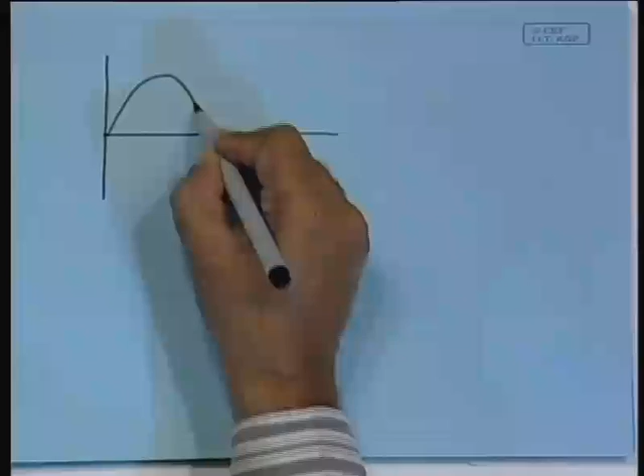By the way, which part is the high tide and which part is the low tide in this sinusoidal waveform? Is it this part and this part? Wrong. From here to here it is the low tide, and from here to here it is the high tide. Remember the timing: this part is when the water is going out, and this is when the water is going in. So this part is called the high tide and this part the low tide, not simply the positive and negative parts of the waveform.

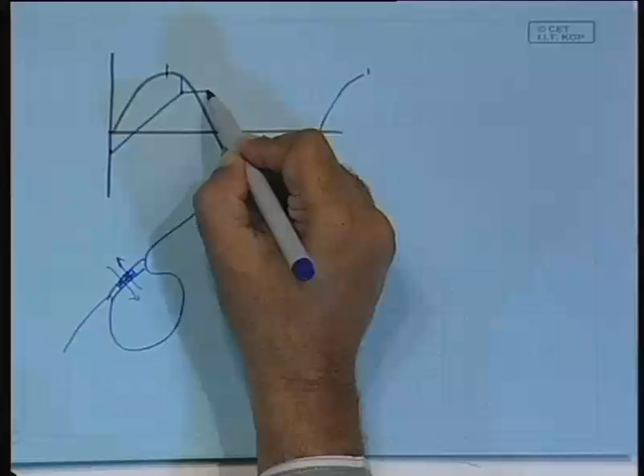Now it was intermittent because if you have a scheme like this, with the turbine here, suppose it is a two-way turbine, during the high tide period it will go up until a certain time when the head is no longer sufficient, and then it is closed. So these are the periods when it will not be generating any power.

And these no-generation periods will come how many times per day? This is one cycle which occurs approximately in 12 hours, so 4 times per day such periods will come when there will be no power generation.

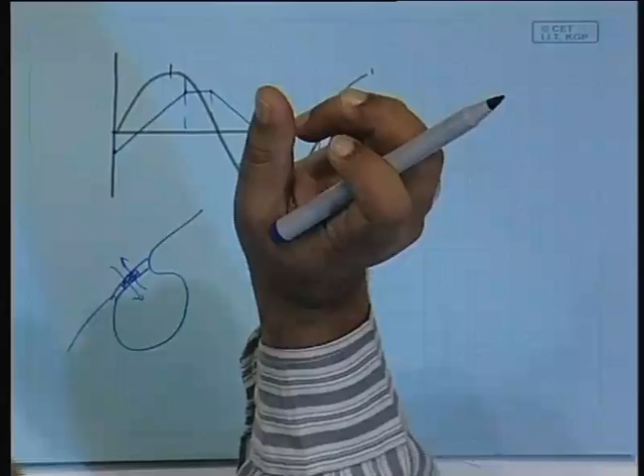So if there is sufficient amount of hydroelectric power capacity in the power system... please, no, you are too late. Okay, come in. I do not understand this, and things are getting recorded.

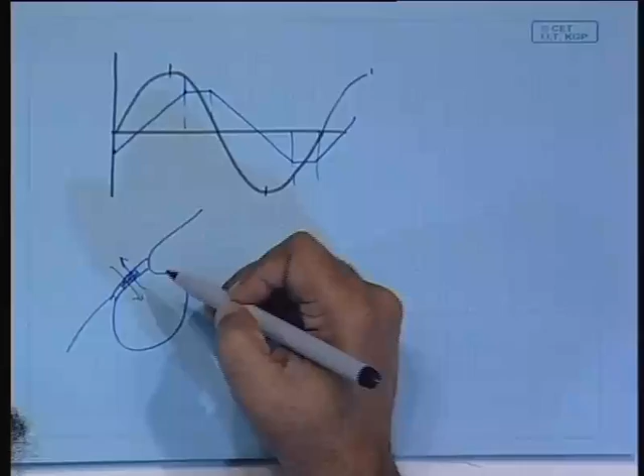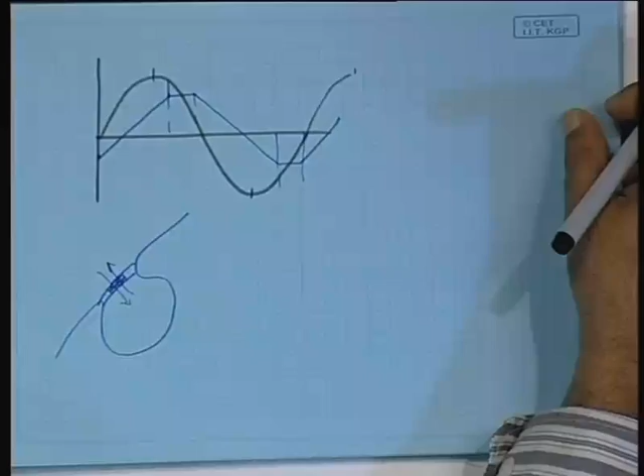So there has to be some other means to produce continuous power, and indeed there have been such proposals and installations where continuous power production is possible. One idea out of many that are available, I will illustrate here.

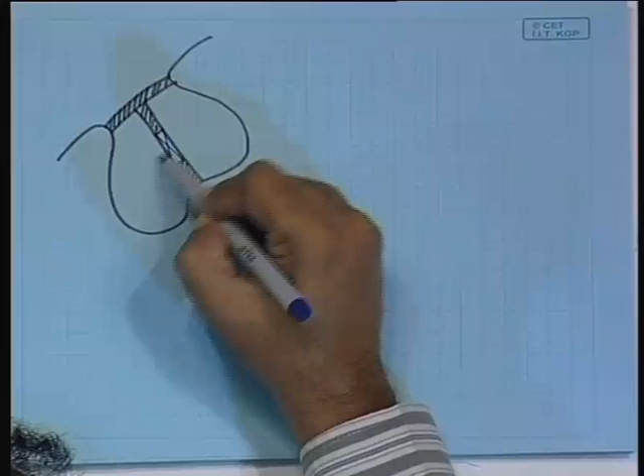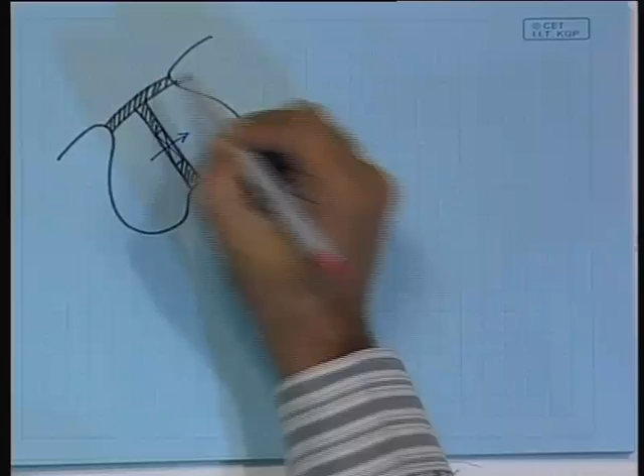Suppose you have some kind of topography like this, so that you construct a dam here, and suppose you construct another dam here, so that the actual basin is divided into two basins. This is one dam and this is another dam. And the turbine is installed not there, but here - a one-way turbine, which is relatively less expensive, meaning it either goes this way or that way. Suppose it goes this way, and in these two parts of the dam there are two sluice gates like this.

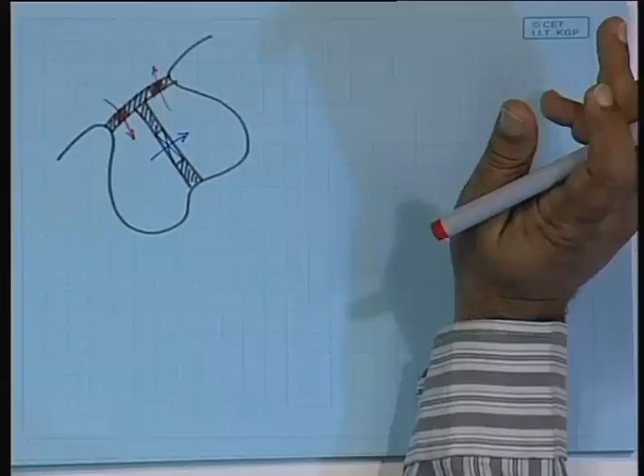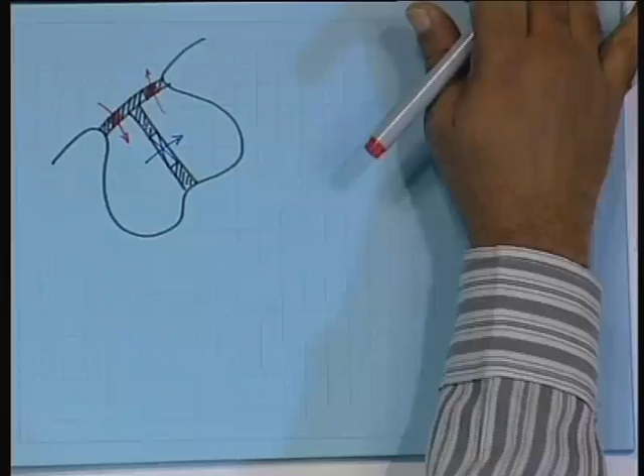In that case, this basin will be maintaining a relatively high water level, and this basin will be maintaining a relatively low water level, because during the high tide you are allowing water to come in, and during the low tide you are allowing water to go out from here. So perpetually there will be a pressure head difference between these two, and this turbine works utilizing that head difference.

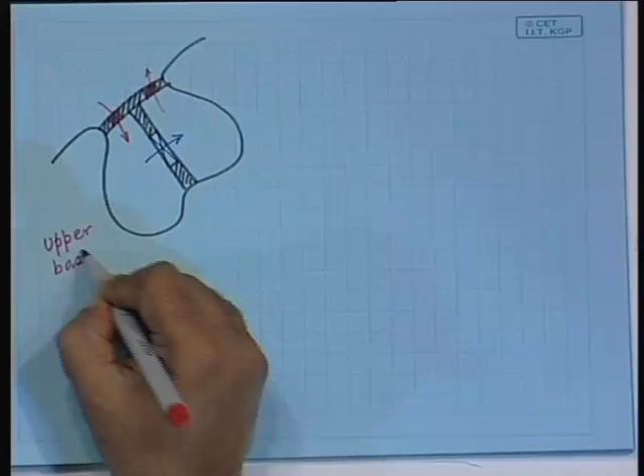So the turbine does not work utilizing the head difference between the sea and the basin, but rather the upper basin and the lower basin. So this is the upper basin, and this is the lower basin. Is the concept clear?

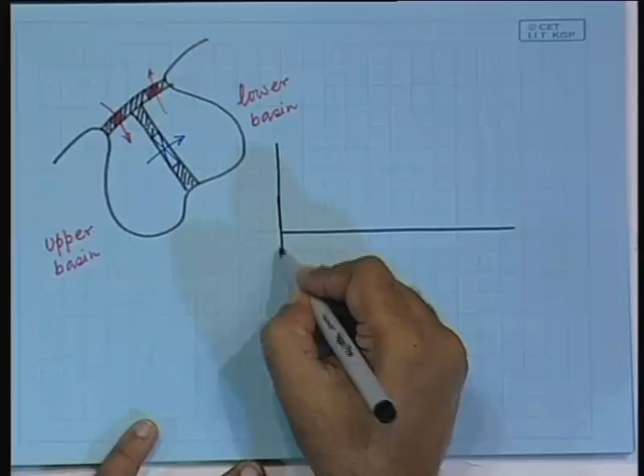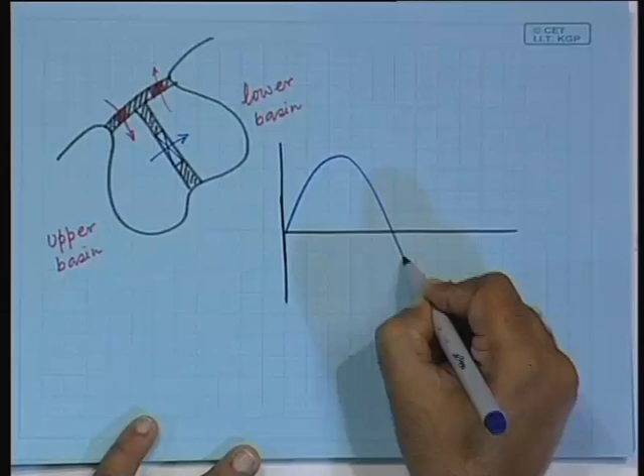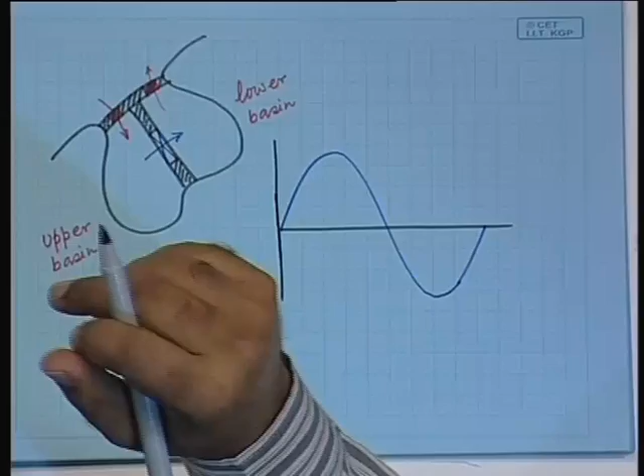Now, in that case, what would be the waveforms like? The sea water level, let it vary like this. Now, the basin water level, there will be two basins, and I will have to draw with different colors. So what I will do is I will draw one with black, another with red. Say I am talking about the upper basin.

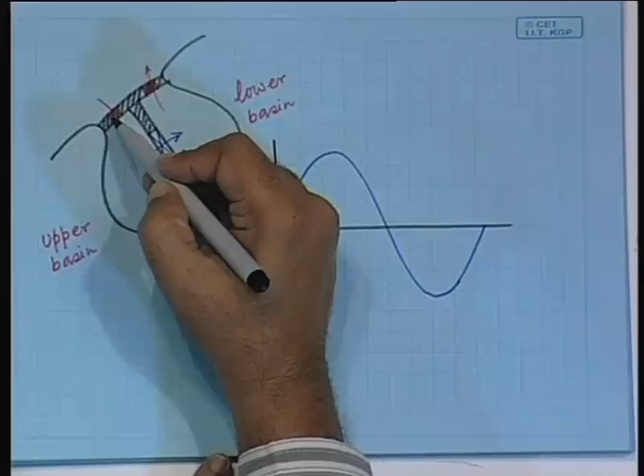So, during the high tide period, the upper basin is open to the sea, right, and therefore it should be filled up, and the difference between the sea level and the upper basin level will be very small. So we can assume it to go up like this.

Now, when it is filled up, when this level is reached, very close to this level is reached, then obviously the gate is closed and therefore it will fall. Right? Why does it fall? Because the water is going from this basin to that basin and therefore the water level falls.

Okay, now let us see what happens to the lower basin. The lower basin, this gate was actually closed during the high tide period up to this point. So it was only rising. Why rising? Because water was coming in from this basin. So even though this gate is closed, it was rising slowly like so.

Say it comes to this point, and at this point what will you do? You will open the sluice gate, right. If the sluice gate is opened, then the water level falls. It will be slightly greater than the water level in the sea, but nevertheless it falls like this.

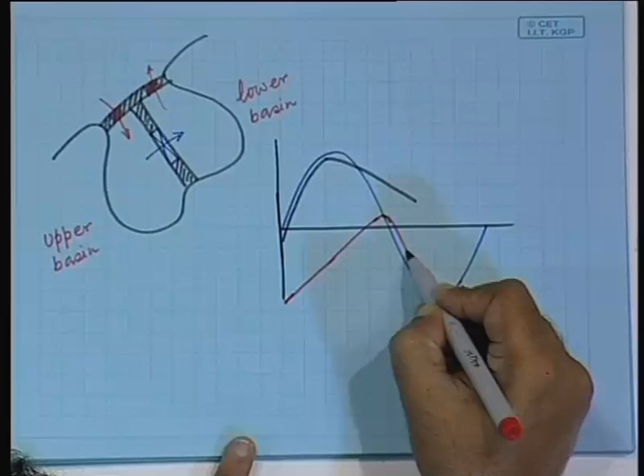And this fellow continues till what time? Till this time. At this time, it again becomes equal to the sea level, and then the sea level would be increasing. So this sea level is increasing, it goes like this, and it comes here. So if I continue to draw, it will be like this, the way it was rising here.

What happens to the lower basin at this point? It is again closed, and then the lower basin's sluice gate is closed. So it again keeps on rising like this.

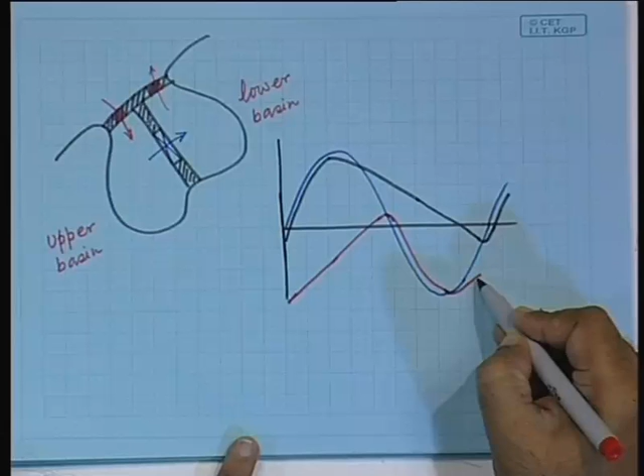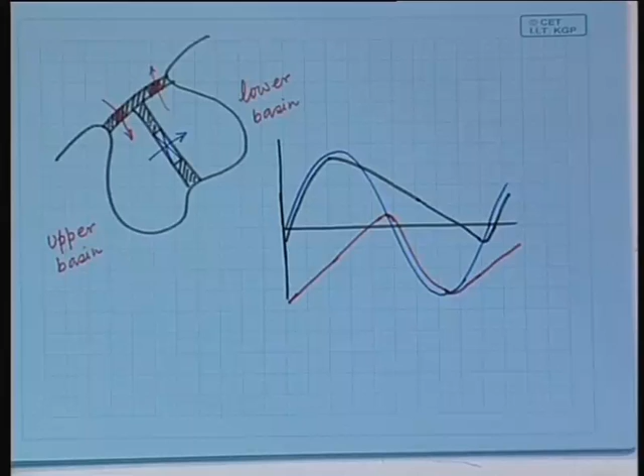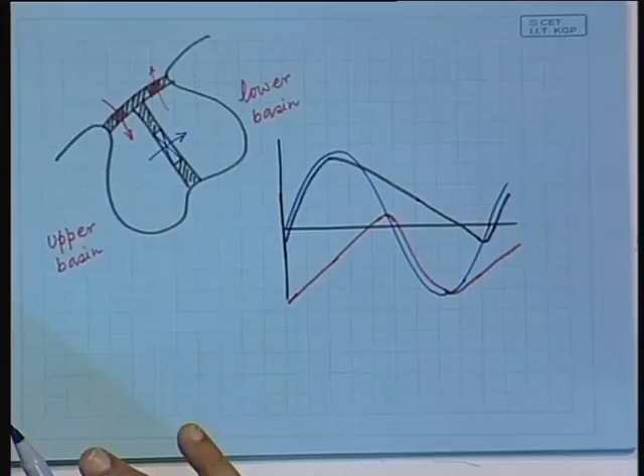So at any time lower basin, upper basin, will the level of lower basin and upper basin match? Same level? No, because all the time there is a level difference maintained between the black one, which is the upper basin level, and the red one, which is the lower basin level. You can always see there is always a head difference between the two that is maintained.

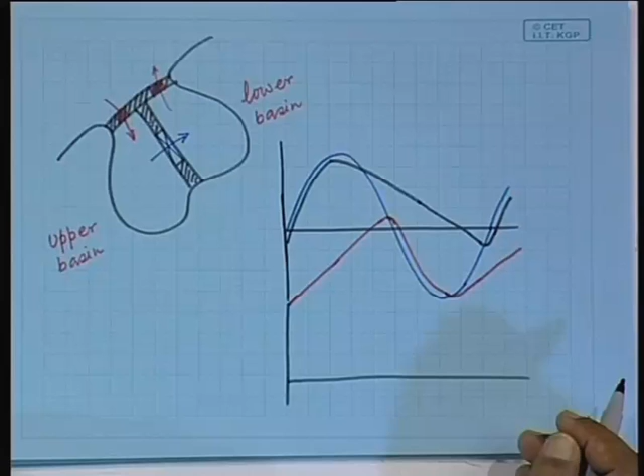So if you draw the curve for the power generation. Sir, yes, so when the water in the upper basin is being filled up in the first half, won't there be a water leakage into this lower basin because you have a turbine? Yes, all the time water is going into that, but I am assuming that more water is coming in through the sluice gate, because the sluice gate does not offer much resistance. So we can logically assume that it would be more or less closely following the seawater level.

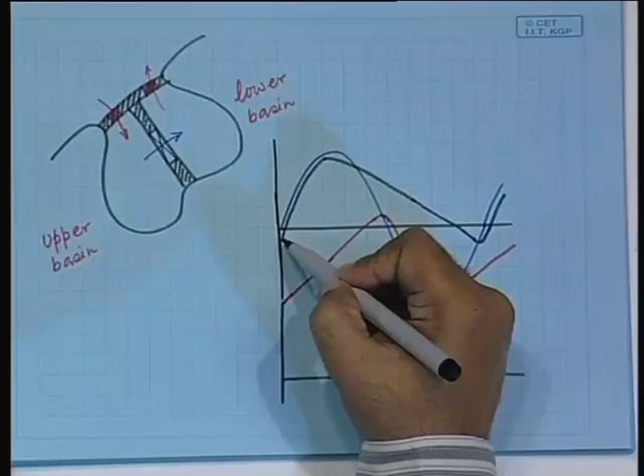Yes, all the time water is going, not leaking in, it is going from this side to that side. By design it will go, but nevertheless more water is coming in from the sea side. So we can logically assume, though it may not be as closely following as I have drawn, it is just in order to illustrate, it may be slightly less.

So what will be the waveform for the power generation like? Notice that even though all the time there is a head maintained, the power generation is definitely not constant, because the head is not constant all the time. The head is large during this period, small during this period, again large during this period.

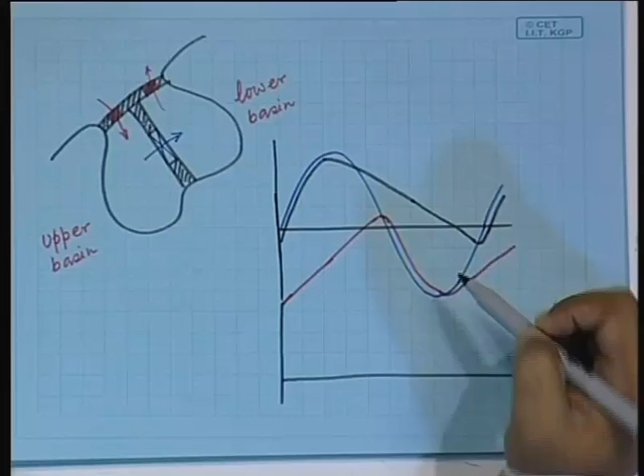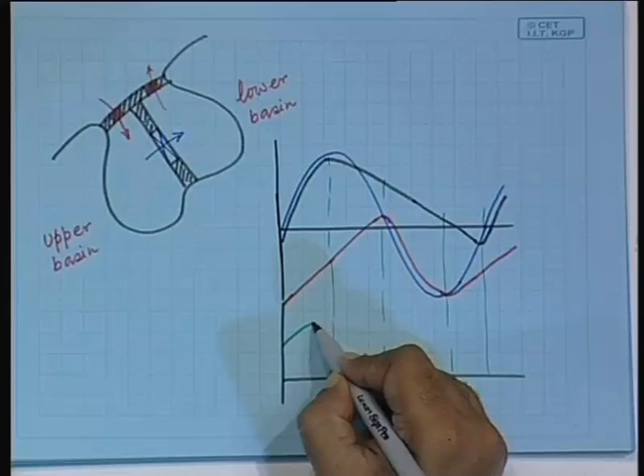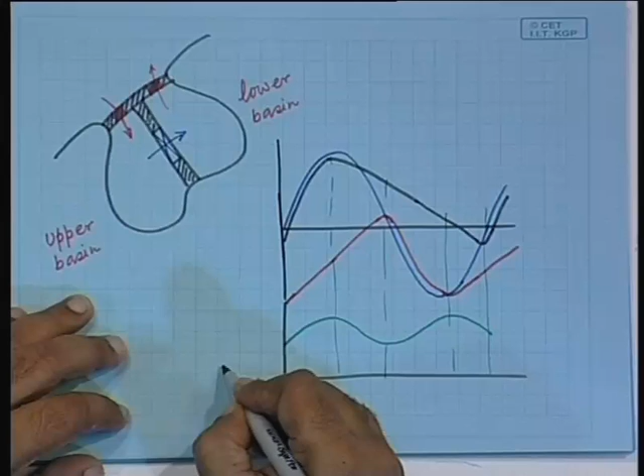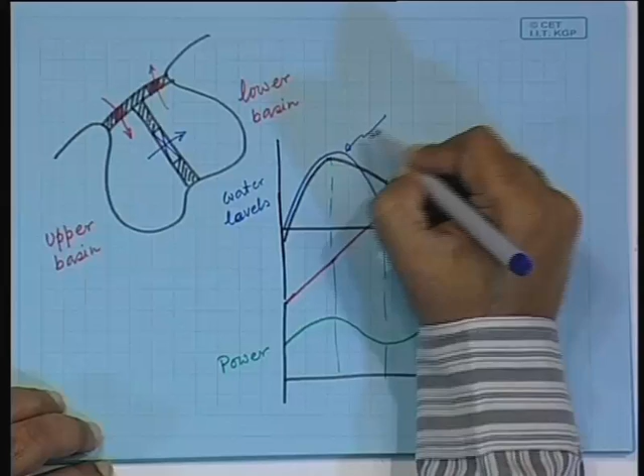So you will see that during this period I expect it to be large, and then it will fall, then it will be large, then it will fall, but nevertheless all the time you have power generation. So the power curve is this, the water levels here. So this is the sea, this is the upper basin, and this is the lower basin.

So when does this sluice gate open and close? I am coming to that. This is the curve of the power generation.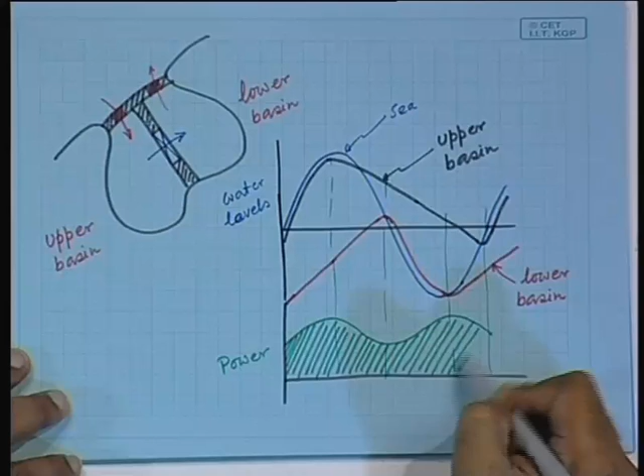So his question is when do the two sluice gates open and close? Can we specify those periods? Let us see. This is sluice gate 1 and this is sluice gate 2, say.

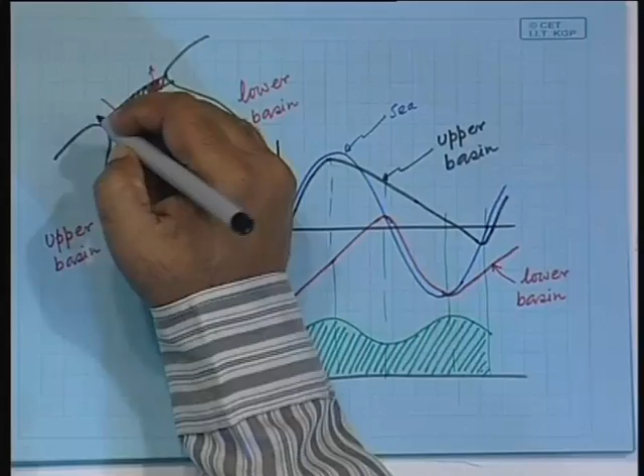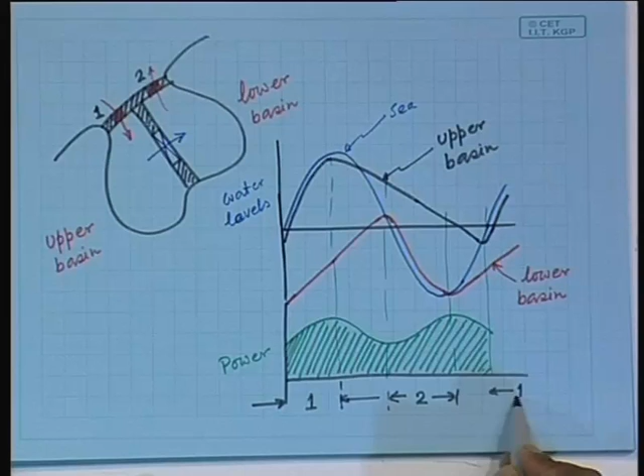Is it visible this side? Yes, it is visible. So 1 is open during this period till this point. Then at this period both are closed. The sluice gate 2 opens from this period to this period. So 2 is from... again both are closed, again at this time 1 opens, right.

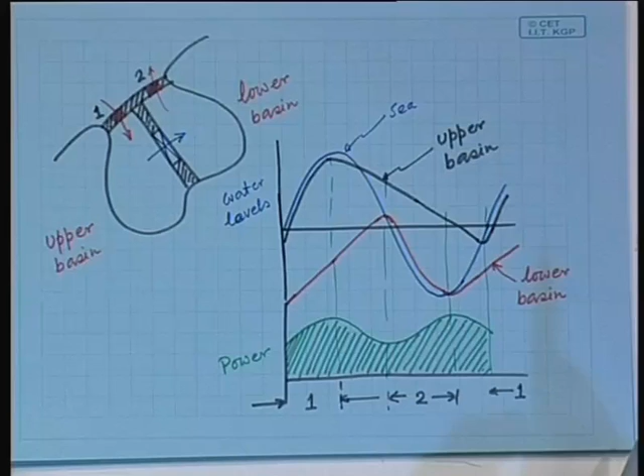So this is called the double basin. That is why I had earlier mentioned single basin, because there are also double basin schemes. It goes by the name of the engineer who designed it. Now this is for example in use in La Rance in France.

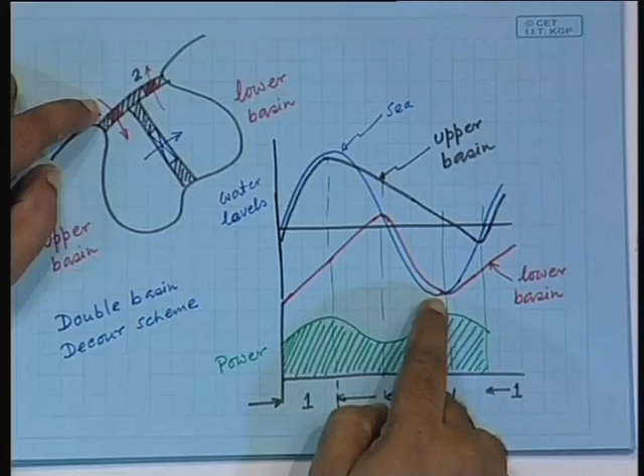Clear. Now similarly, we can easily imagine that there can be more. You might possibly argue why not install turbines here also. There can be those possibilities, turbines installed in those places, yes. You might argue why not use pumps in those places to increase the water level here and decrease the water level here, yes, that is also possible.

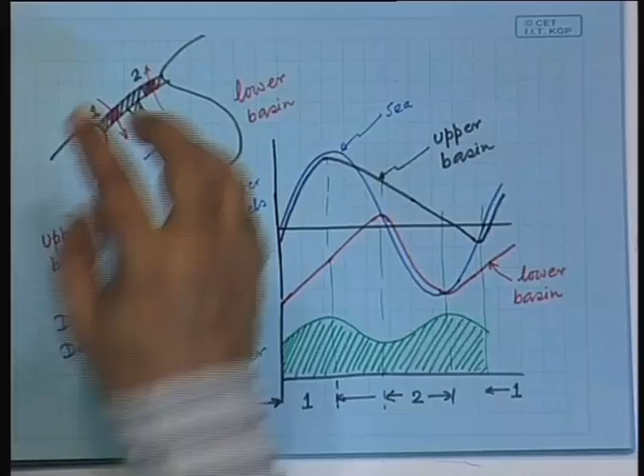In addition, there are also schemes where in this part there is a very complicated enclosure created with one turbine, so that the same instrument can be used both as a turbine and as a pump with various directions of gate opening and gate closing. All those schemes are available and installed in various places.

And these schemes normally go by the name of the people or the engineers who designed them. For example, you would hear of the Decour scheme. There is another French engineer who designed a similar thing. The Bernstein scheme, who designed the Russian installations and stuff like that. But in essence, whatever we have learnt so far, those things are only combinations, various types of combinations of essentially the same ideas.

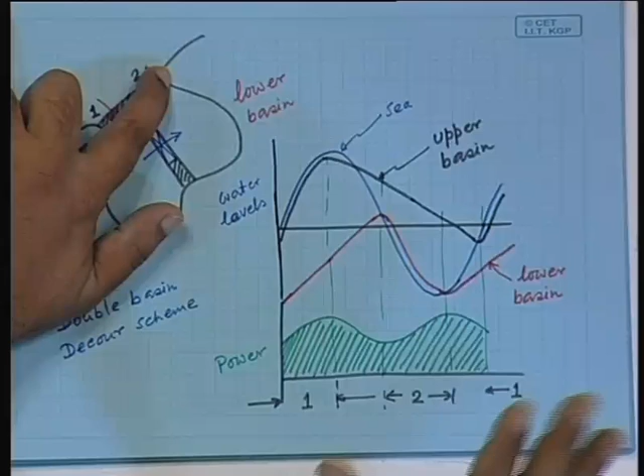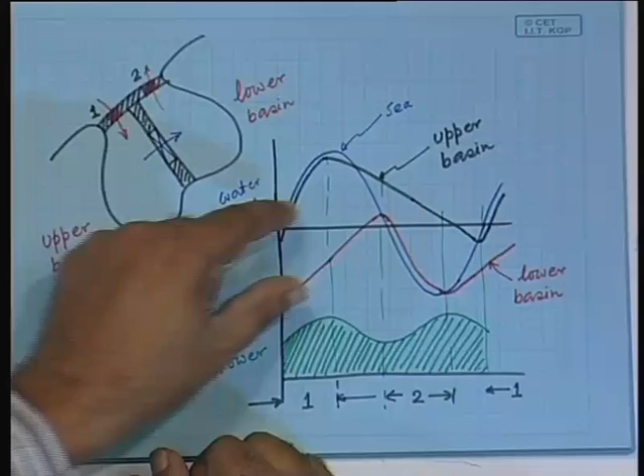So one normally tries to generate continuous power, one normally tries to maximize the amount of power generation, and in order to do that, you might say okay, I will install one turbine here but no turbine there, because an additional turbine would mean some additional initial expenditure. So one turbine here, which means if it is a turbine, the water level will not go up as fast as it did if it were sluice gates. So the head difference available for this one will be lower, but often that can be offset by additional pumping by whatever is here.

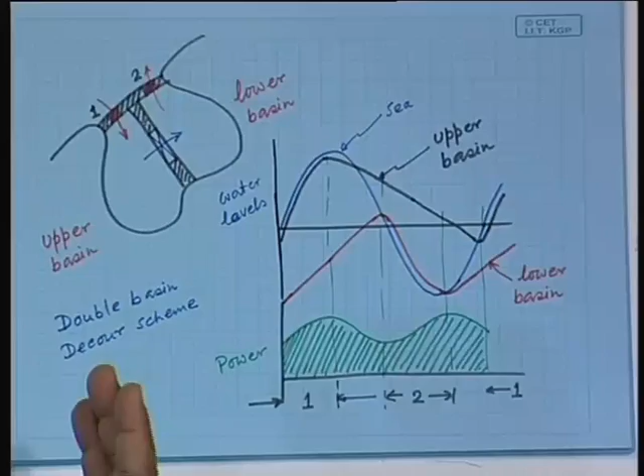So all these schemes are now in use in various places, and as I told you, major installations are in France, La Rance. In UK there is the Severn river, on which there is a tidal power plant. In Russia there are a few, and in Canada the big one. Is that clear what I have told so far?

As I have told you, tidal power plants normally require low head turbines. Why? Because the head available is normally of the order of 1.5 to 2 meters. Only in very rare cases do we have a head larger than that. So 2 meter head is reasonably low head, but at the same time it is true that in river based hydel power plants...

River based means normal hydel power plants, the ones in the upper reaches of the river in the mountains, they have quite large head but small flow. The ones in the intermediate range have medium head, medium flow, but the ones in the lower range normally have large flow but low heads. So the low head turbines are normally available, designed for use in the rivers.

So the turbine is, remember, in any alternative energy resource, the cost actually is because these components that you use are not commercial products. Each one has to be designed for that particular purpose. As a result, the cost goes up. But the advantage of tidal power plants is that mostly the turbines are industrial products, available for regular use in river based plants. So, what are the things available?

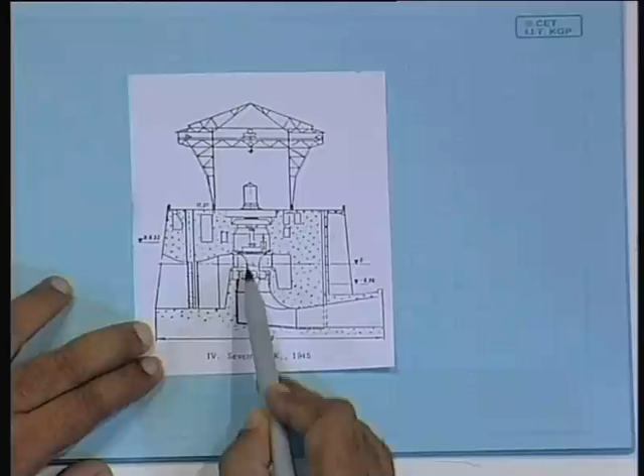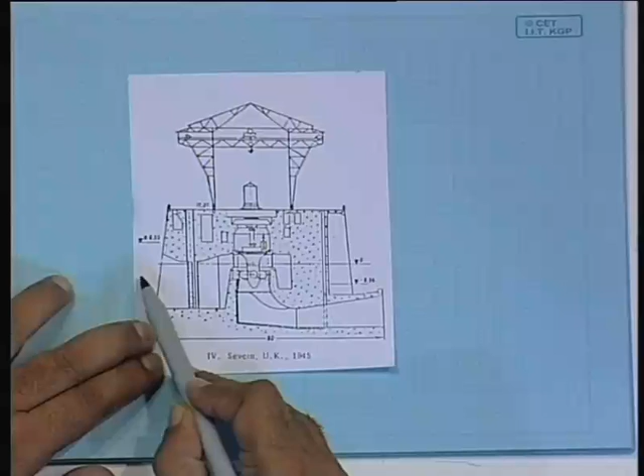Notice here is the path of the water to come and go. Can you see? It's somewhat small, but you can probably see it like this. Here is the turbine, a vertical axis turbine with the generator stationed here, and this is the civil engineering construction shown with the dotted lines, meaning these are concrete constructions. So here is the vertical axis turbine, the generator is here, the turbine is here, basically a propeller type turbine, simple construction. Notice the water flow passage, it goes like this.

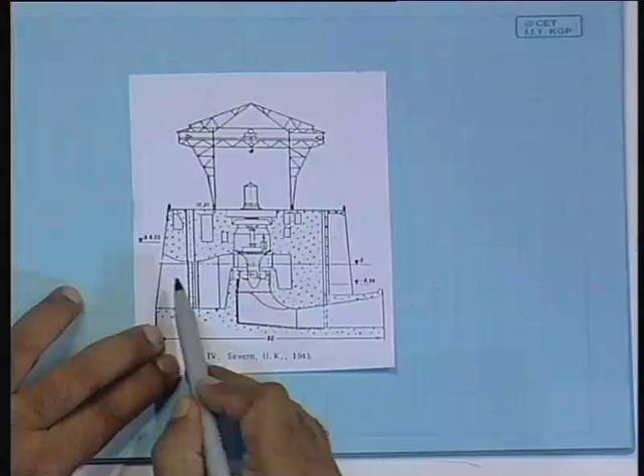These are the standard available ones for low head installation in river based hydel plants, where these are installed in the lower reaches of the river. Now notice that for this to happen, there has to be some area, some height available in this part, because it has to accommodate the vertical axis propeller.

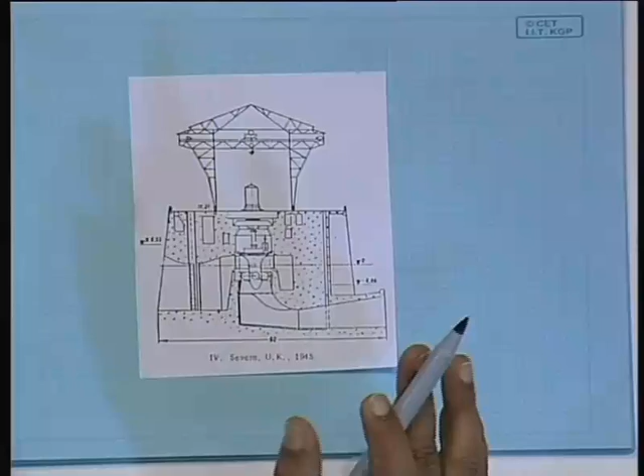Not only that, before the water reaches the propeller, there has to be a turn, a bend, and we must ensure the water does not get turbulent, else the power production will go down and there will be vibration. So there has to be some range available before it touches the turbine, which also increases the amount of head needed. After it, again there is a bend, and you have to avoid creating turbulence there, so there has to be some head available here too.

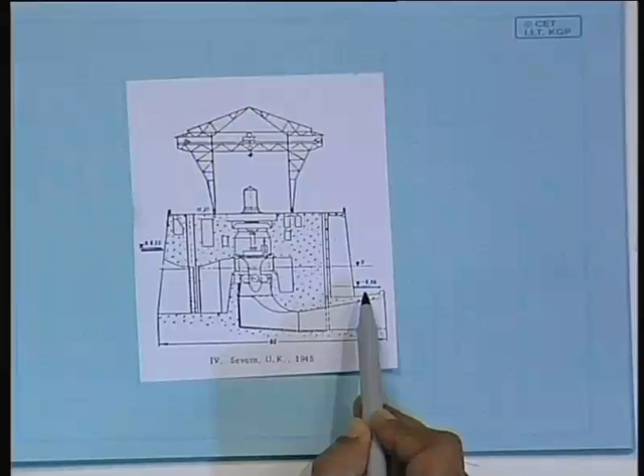So the head the turbine actually works against is this difference - say one level is here, and outside it is somewhere here. This is the actual head difference, and the turbine works against that head difference. But in order to have this kind of turbine, you must have some minimum head available so it can accommodate these two bends.

But this is a very convenient construction. Why? Because you can directly situate the generator above the water level.

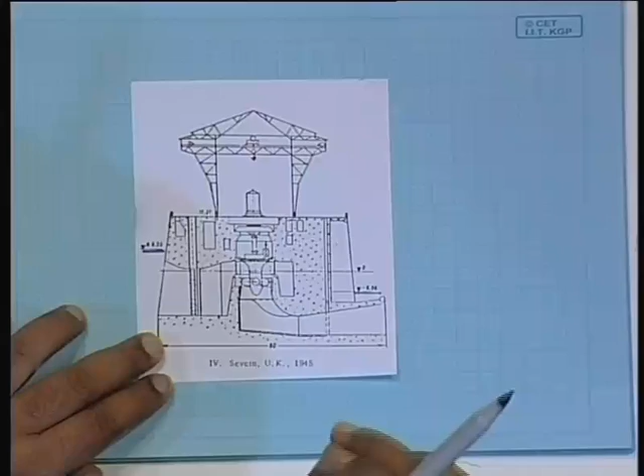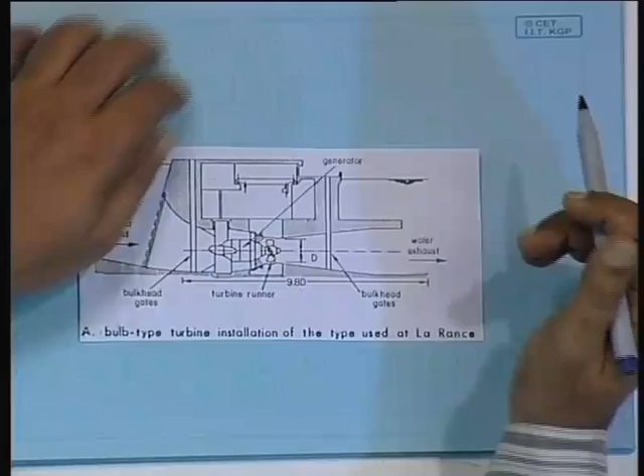Now, as I told you, there are some improvements over this design specifically meant for very low head hydel power plants. These are again commercially available. One is very popular for relatively low head plants - the bulb turbine.

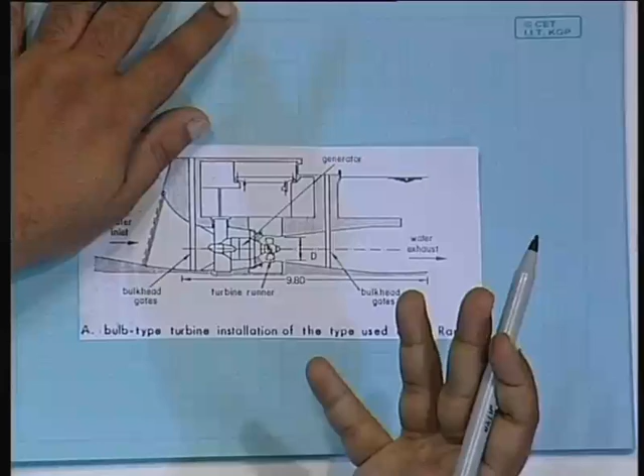In this case, this is the water inlet. You can see this is the water inlet, and here is the bulb. So water flows like this, and here is the turbine. The bulb is a metal casing, watertight, that houses the turbine. So the turbine is housed inside the water, but by means of this watertight bulb, it's made free of any water intrusion.

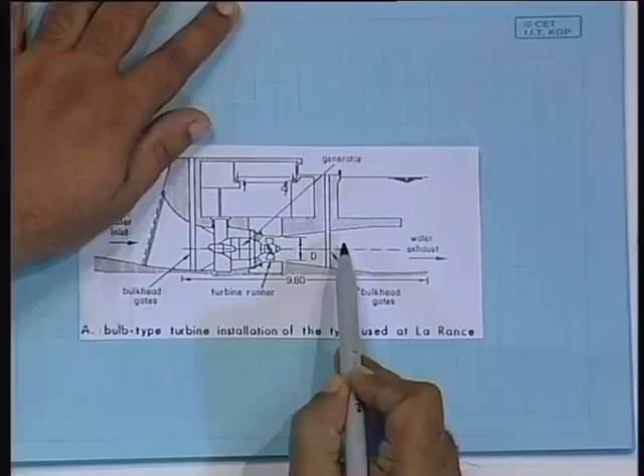So notice here you have either a straight flow or a slightly bent flow, but not a complete S-type construction with two big bends. So naturally the head you can work against is very low. These are very standard constructions for low head plants.

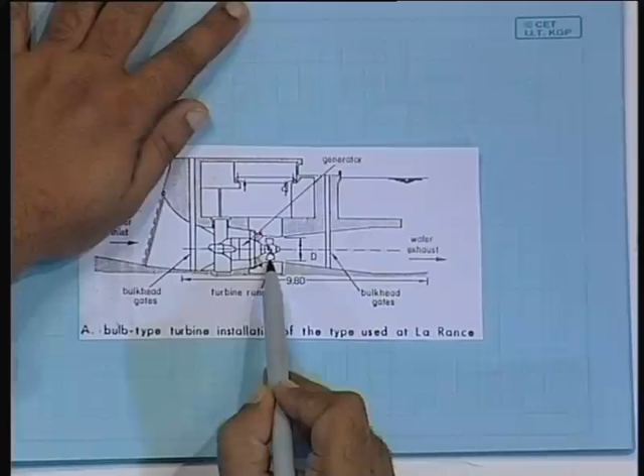There are obviously advantages and disadvantages in any construction. One, because the bulb has to accommodate the whole generator and the gearbox, the water passage has to go around the bulb, so the construction must be such that it does not create turbulence when water enters the blade. That's one problem. The other problem is that the bulb must be relatively small, so the generator and gearbox size also necessarily needs to be small. So you need very efficient generators for this purpose. Nevertheless, these are very useful constructions installed in many places.

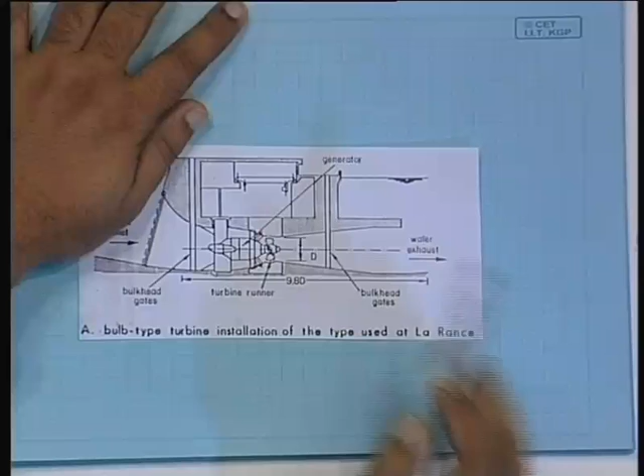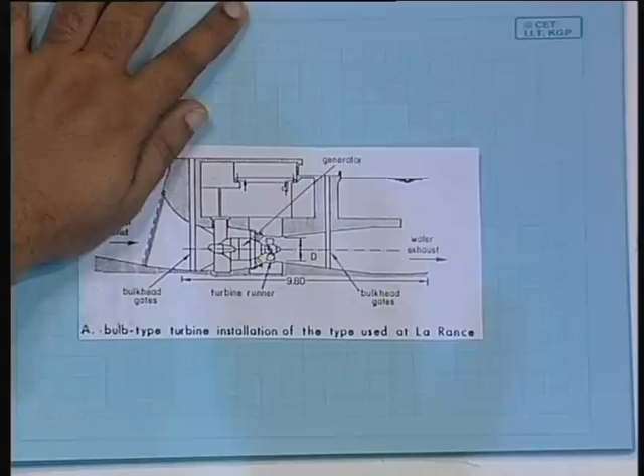For example, here you can see La Rance, the place in France where this was installed. So water actually does not flow this way, water flows this way.

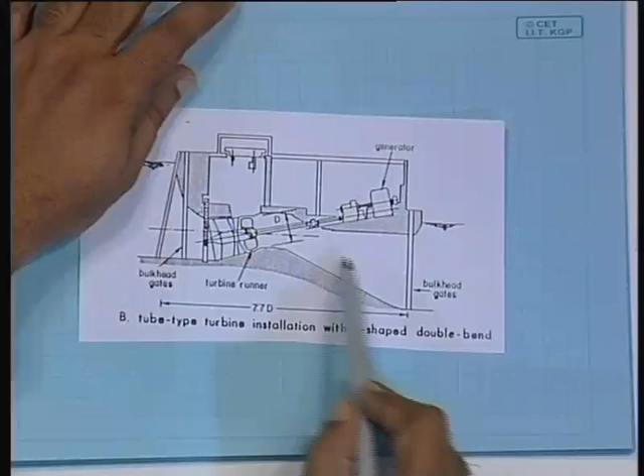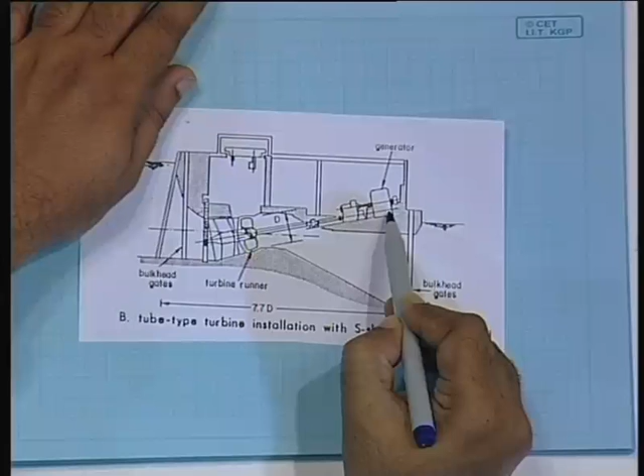Now, an alternative construction is the tube turbine, where you have the water flow something like this. It has a slight bend, not as much as the complete S bend for the vertical axis turbine, and the turbine is installed at an angle, not vertical or horizontal, at some angle like 20 degrees, and the shaft goes through, here is the watertight bearing point, and it goes to the generator, which is also positioned in an inclined position and above the water level. Here you can see the water passage would be something like this.

Here also the head requirement will be rather small, but not as small as the bulb turbine. So this is called a tube turbine, tubular construction. The whole thing has tubular construction. This is also available, but more available commercially is the bulb turbine.

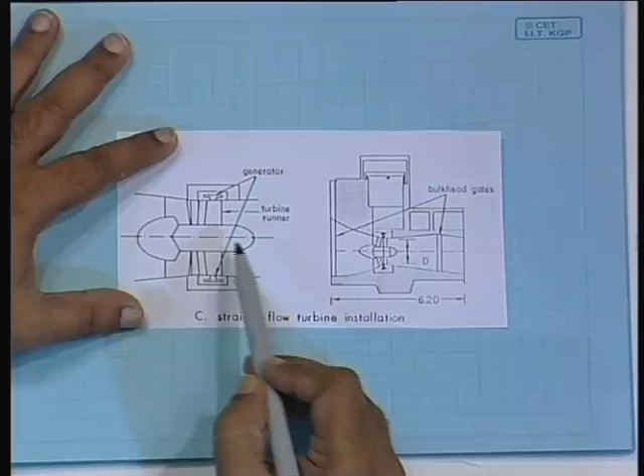There is another construction that has been proposed, but I do not know where it has actually been installed, where it is completely straight flow. The turbine's blades are actually connected to the outer periphery. That means the blades extend out to the outer periphery, and at the end of the blade, you have the generator winding.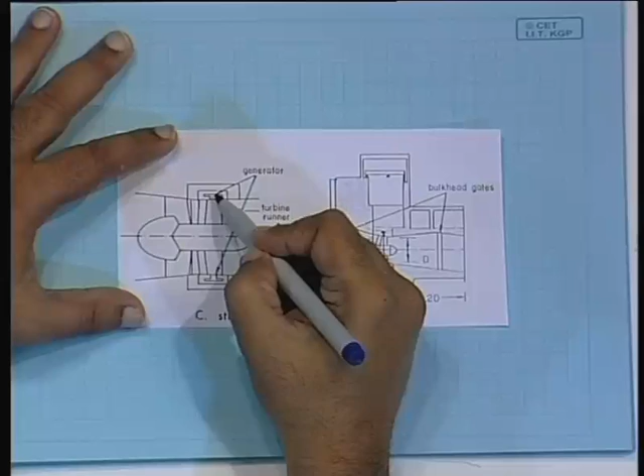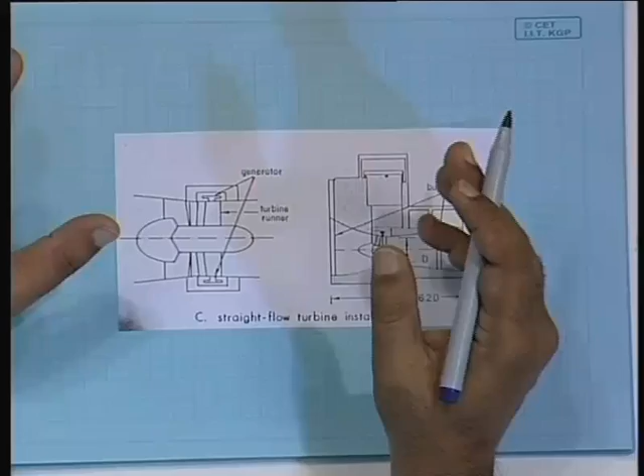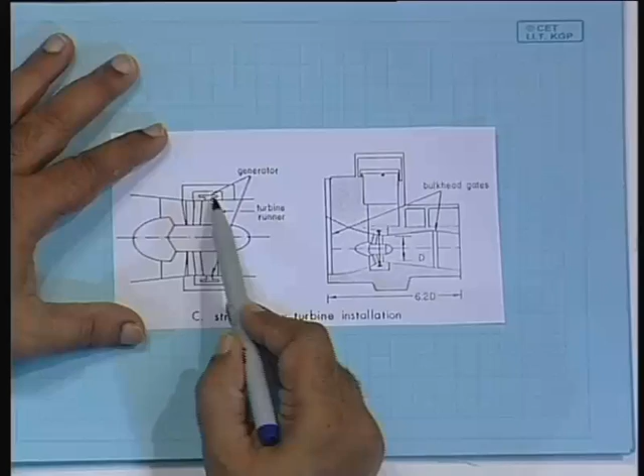The stator is static, while the generator rotor winding is mounted at the top of the blade, so that as the blade rotates, the rotor windings also do so. Obviously, here you would not have any scope of putting a gearbox, it is directly connected. So naturally the number of poles have to be large, so that you can still generate 50 hertz. The point is that here you have a completely straight flow, and therefore the head that you can work against is very low, the lowest, but there are obviously problems in making such a rotating arrangement watertight. So I am not sure how many places this has really been installed.

So you can imagine the whole construction to be something like this. Here you can see the turbine and the generator in this part. So that is how it is installed.

Right, so these are the different types of generators that are used in tidal power plants, and naturally what type of scheme you would use, what type of generator, what type of turbine you will use, all that depends on the specificity of the site. There is no general recommendation for that.

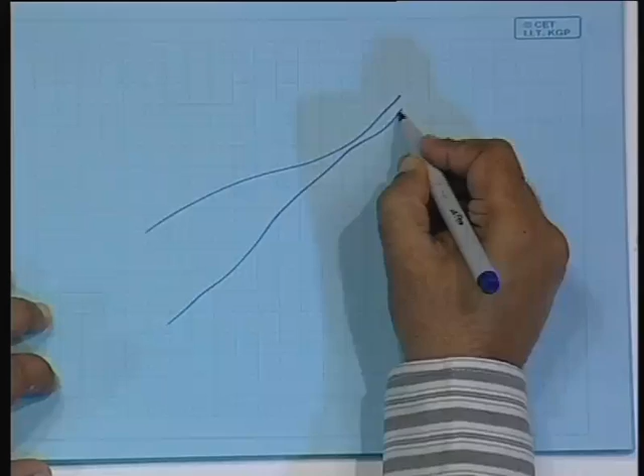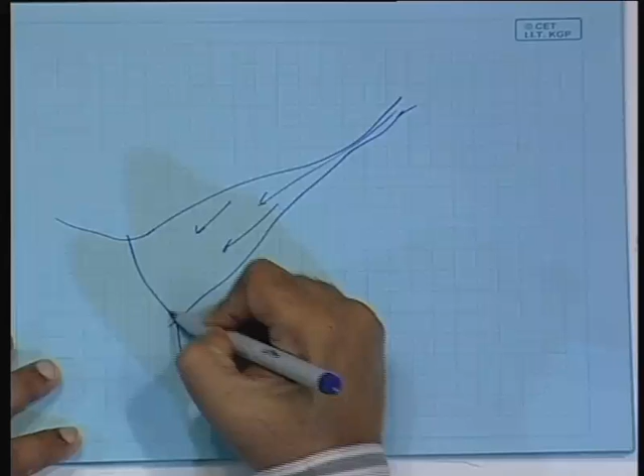What is the specificity of the site? One, is there a scope of having two basins? When will there be a scope of having two basins? Because if the structure is something like this, that you have the tributary of a river, so the water goes like this. How will you create the two basins? You can put a dam here, and that is it. So in such cases it would be rather difficult to make two basins.

However, in many cases you have deltas, you have islands. So if you have that, it is not difficult to have two basins, like if you construct a dam like this. So much of the dam requirement would be offset by the existence of a large island. In those cases, the creation of two basins might be economically viable, because the whole thing depends on the installation cost. Running cost is very small, there is no fuel requirement, so the installation cost should be kept within an acceptable level, and that all depends on the topography of that site.

So whenever a particular site is considered, one first has to consider the aerial view, and from there identify the places, find out from the ground how much is the water level difference, which may vary from point to point. So all that has to be taken into account. Finally, you have to decide what kind of scheme you can install, but in general it is always better to have the installation of various types of turbines as well as pumps.

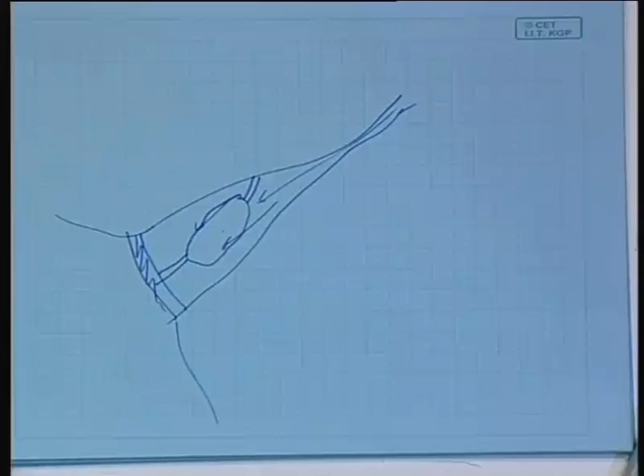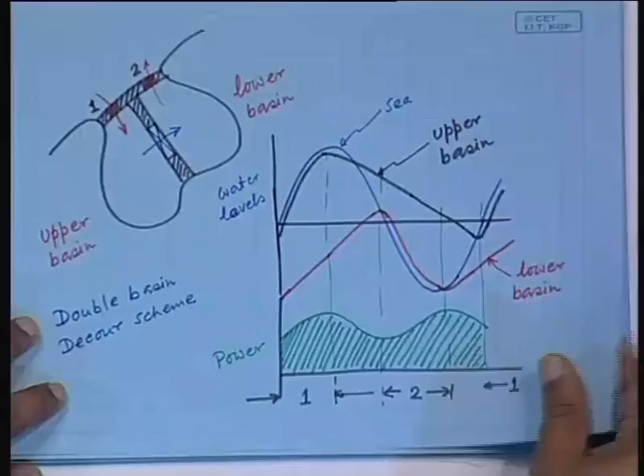Now, you notice that so far we have talked about solar energy, wind energy, tidal energy, and in course of time we will talk about geothermal energy, then ocean thermal energy. But you notice that most of the things we are talking about in terms of renewable power are all intermittent. Wind power cannot be generated unless there is wind, and wind flow is somewhat varying all the time, unpredictably. Tidal power is very predictable, when it will come, when it will not, but nevertheless mostly intermittent, unless you have a scheme like this, but then also the power production is not constant, and therefore there has to be some kind of subsidiary arrangement for that.

In case of solar energy, there is no solar energy during the night. So, these are all schemes that produce whenever energy is available, you produce. So, in the whole power station, where do they come in?

They come in the base load part. The whole load is divided into a few parts. At the bottom there is the base load, normally taken by very large thermal power plants or nuclear power plants or something like that. The intermediate load is smaller thermal power plants, and if there are relatively large hydel power plants, and the peak load is almost totally by hydel power plants, because they can be started and stopped quickly. The idea is that the base load plants will work round the clock 24 hours at the same load. The intermediate load plants will vary their powers, but the peak load plants will start and switch off.

Now, where in the whole picture do these renewable power sources come in? They have to go into the base load plant, because conceptually, whenever energy is available, use it. This means that the actual base load plants, catered by very large thermal power plants, 2000 megawatt thermal power plants, their requirement now goes down. Let me show, suppose you have this as the power curve.

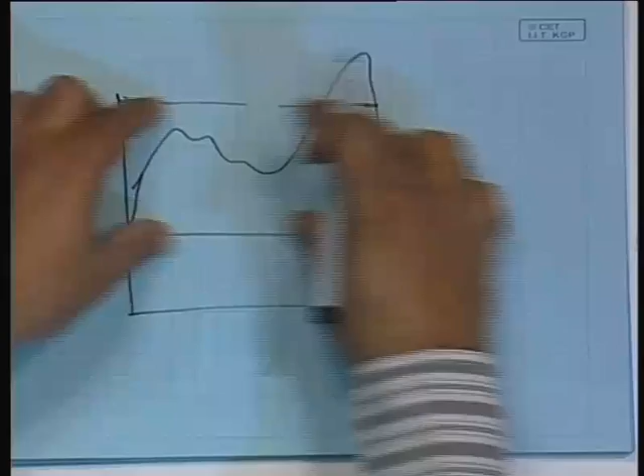Normally, you cater this base load by those big plants, this load by the smaller thermal power plants, and this load by the hydroelectric plants, or earlier we used to use gas turbines, but these days gas turbines are somewhat going out of favor, except where natural gas is available. In Calcutta earlier there were gas turbines, but nowadays they do not function, because the cost of running is too high, as they have to run on oil.

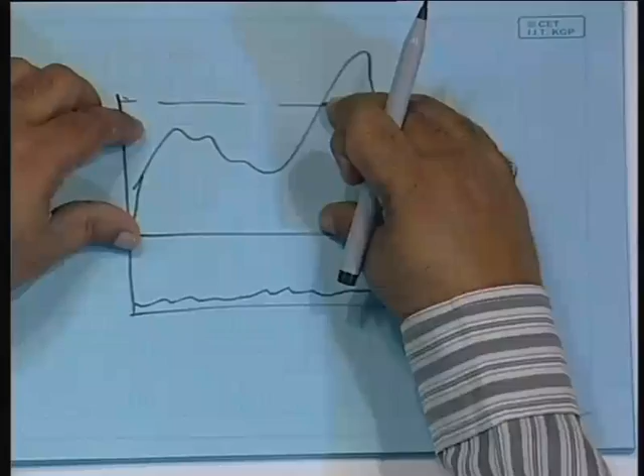So, this is mainly by hydel power plants, this is by hydel as well as smaller thermal, and this is by larger thermal plants. When a power system has these renewable sources, they must be accommodated somewhere here, and since these are variable, the amount that was earlier catered by the base load plants must also vary. So more power goes from the base load bigger plants to the intermediate load plants, because the intermediate load plants can accommodate variation of the power.

So, one implication of the inroad of renewable energy is that you have to have a larger number of other plants that can vary their power. Clear? But at the same time,

these renewable energy sources are often complementary, in the sense that when one is available, the other is not, and so on. For example, wind is often more available in the evenings - since we have been in Kharagpur for some time, have you noticed the wind speed goes up in the evening? That is also when solar energy is not available. So, one can imagine a combination of solar photovoltaic and wind energy, so that overall generation is more or less able to cater to a constant load.

Such things are even more necessary in the islands. For example, in the Sundarbans there are many islands that normally have to run diesel in order to make electricity available. Every evening for about 3 hours a diesel plant runs, and then at 10 o'clock you have to go to sleep, that is it. So, from 7 to 10, 3 hours it runs. It is extremely expensive, because diesel is very expensive.

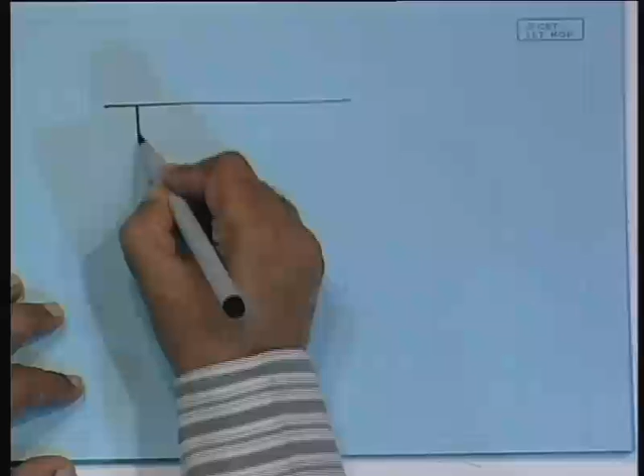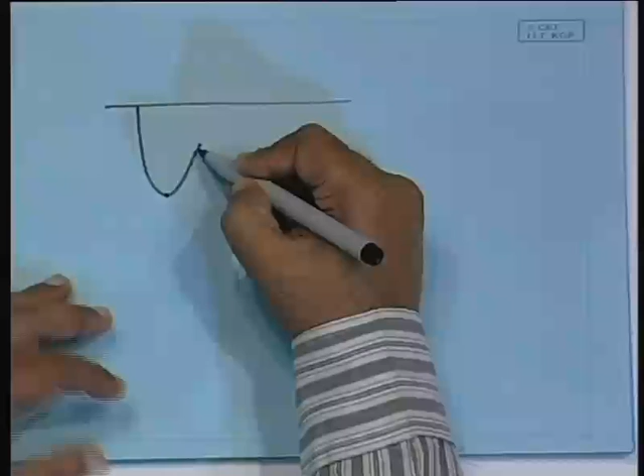An industry having switched on right in the morning, a huge amount of load suddenly comes in. So what happens - even that is immediately catered to by the kinetic energy of the generator rotors. The kinetic energy would fall, the frequency would fall, and the steam governor would react by increasing the steam input. So it will tend to go up, but often that overshoots and oscillates with some kind of oscillation back to the right speed.

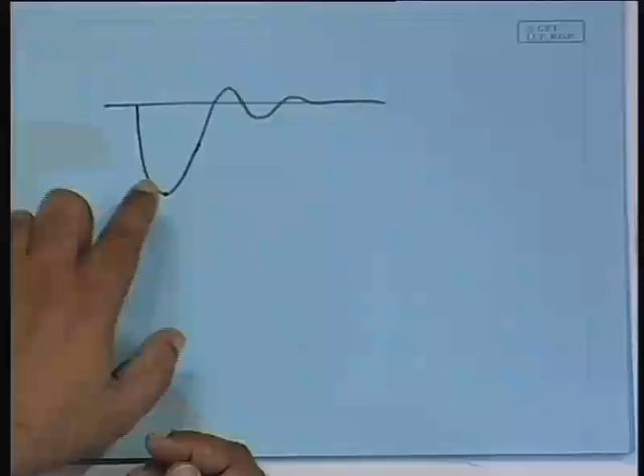That is what happens even if you do not notice it. And naturally the amount of fluctuation depends on what? It depends on the amount of kinetic energy in the generator rotors, namely how big are the generator rotors, the amount of inertia it has. In smaller power plants therefore, this has a problem.

In smaller power plants, remember a wind generator working - a wind turbine - its kinetic energy is that storage which can immediately supply some load. Similarly, if you have a tidal power plant, its generator is that kind of storage which can immediately supply some load until it can cater to the demand.

If a whole power system is controlled only by renewable energy sources, then we do not have any control like that. Because in case of a normal power plant, you have control over the steam governor, and you increase or decrease the amount of steam that goes in. In a wind power plant, what do you control?